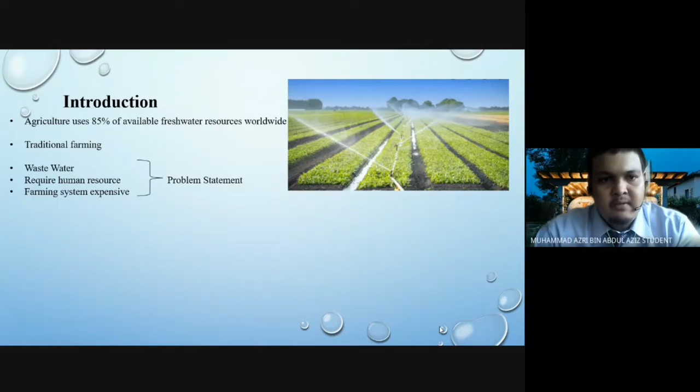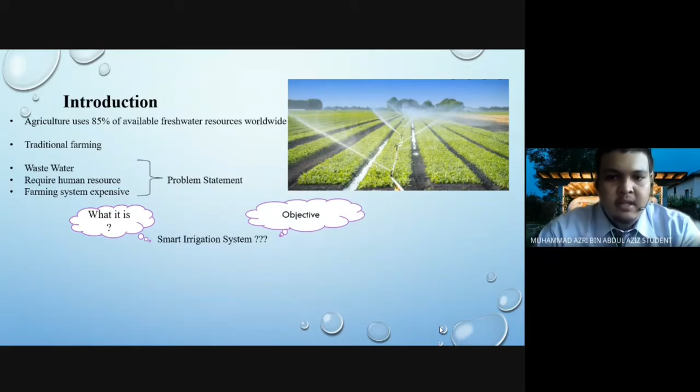So we are here to design a smart irrigation system. A smart irrigation system helps farmers control their crop condition automatically based on sensors. The objective is that the system should be sustainable and affordable, while maintaining the crop conveniently.

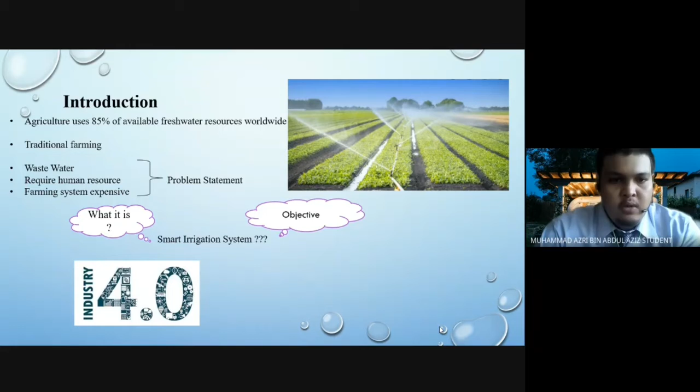We use Industrial Revolution 4.0, which is the Internet of Things, in order to support SDG goal number 12, which is responsible consumption and production. That's all from me. Thank you.

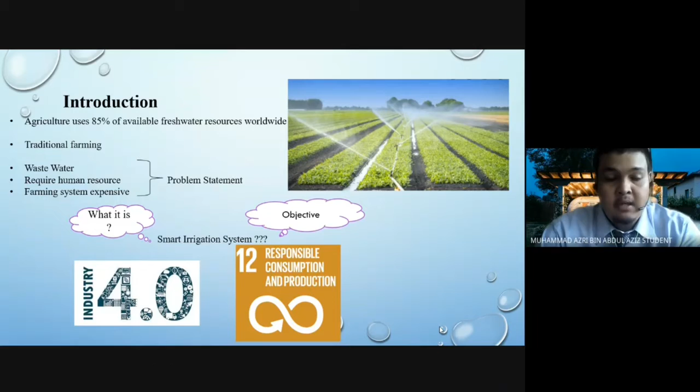This section focuses on outlining current available products of existing precision farming systems. This is to understand the key performance of the products toward obtaining customer requirements, and also to determine which among the three selected performs best in suiting customer requirements.

These are the three selected products. The first is Gardena Micro Drip Irrigation System, a timer-based irrigation system powered by battery to supply water to the plant. The second is a manual simple irrigation system, which is a simple manual watering system that requires electricity from the power grid. The third is TB-Hyve XR Smart Sprinkler Control, a Wi-Fi based sprinkler timer used to irrigate farms.

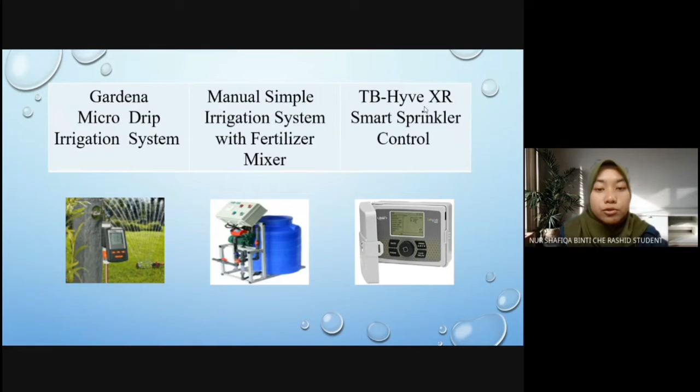Next is 2.2 Design of Market Survey. In this survey, it is targeted to obtain about 50 respondents through questionnaire. A questionnaire is a set of questions created to gather information.

In order to carry out the survey efficiently, especially through this pandemic situation, the questionnaire was generated through Google Form, which gives advantage in terms of reaching farmers, especially those staying in rural areas. This questionnaire consists of three separate sections: Section A, Section B, and Section C.

Next is 2.3 Survey Analysis. Section A is Demographic Profile, also known as personal information. It consists of gender, age, and scale of farms.

The next is Section B, which is General Overview. Here is the question we asked respondents to answer. In this section, it helps to understand what problems are related to the farms.

The last is Section C, Customer Requirement. This section is about respondents' opinion on the solution provided through Likert scale type questions. This information corresponds to the customer requirement which will be implemented in a house of quality.

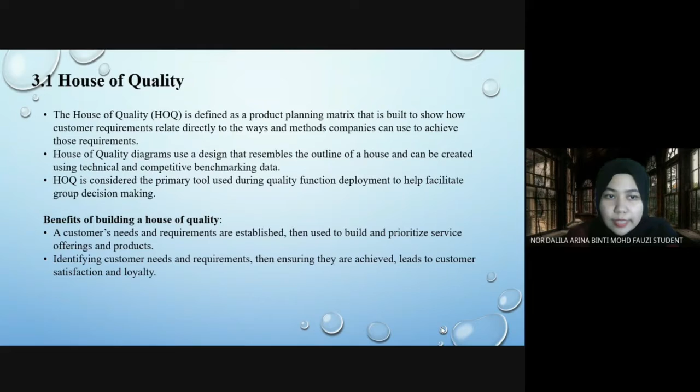Benefits we can get from house of quality: customer needs and requirements are established, then used to build and prioritize service offerings and products. Second, we can identify customer needs and requirements, then ensure they are achieved, leading to customer satisfaction and loyalty.

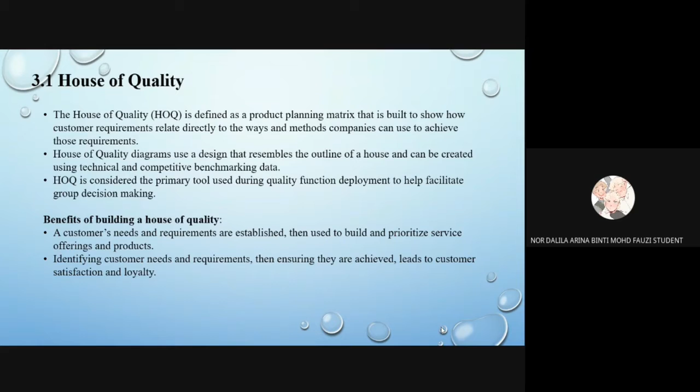First is reliable, easy to maintain, minimize water usage, save time, smart water control system, low electricity usage, affordable, environmental friendly, easy to use, and reduce manpower.

Then we look at engineering characteristics. We conclude that from our design, it consists of cost, material rigidity, volume of tanks, weight, durability, time taken to install, electricity, and expected lifetime.

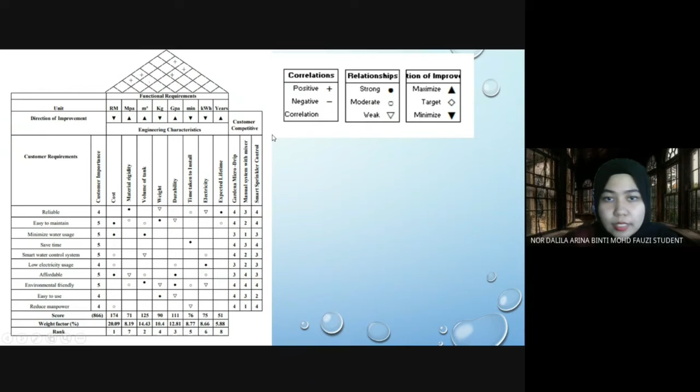Next, we see customer competitive, which is Gardena micro drip, manual system with mixer, and smart sprinkler control. From this rating, we can see that Gardena micro drip has the highest rating.

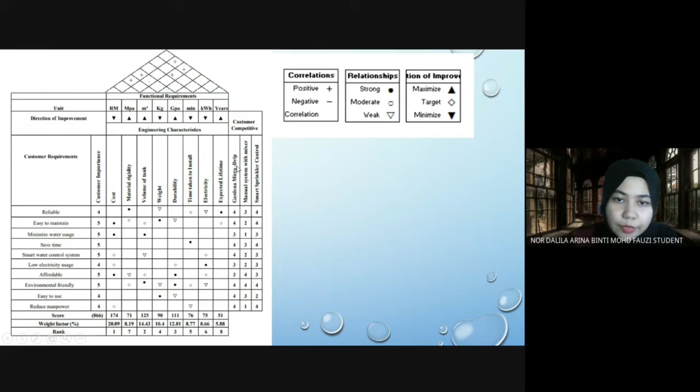Next, we move to product design specification. What is product design specification, or PDS? Product design specification is a listing of the critical parameters, specification, and requirements for the product you are designing. It is a statement of what the product should be and should do. PDS is created during the problem definition activity very early in the design process.

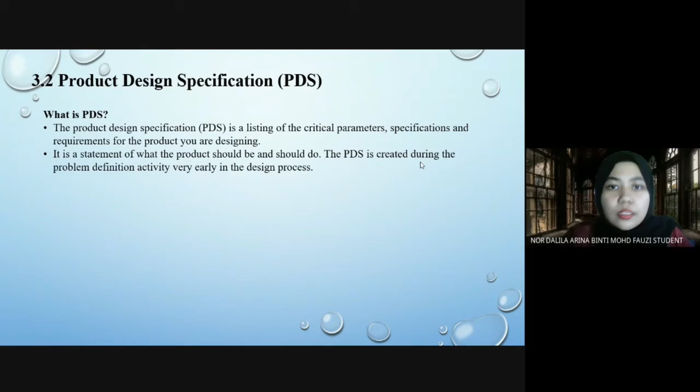Why is product design specification important? PDS is important because they can provide clear instruction on project intent, performance, and constructions. So these are the product design specifications of our project, which is smart irrigation system.

First, we have product identification. As we can see, it is an affordable precision farming system, away from electrical grid and power system. Smart watering system that avoids plants from drying out. Next, market identification: it consists of small agricultural and small holdings, and farmers have limited space for farming.

The third is special feature: Arduino microcontroller in our project. The Arduino microcontroller is used to operate the solar power pumping system. Then, we also use a moisture sensor. The moisture sensor is to detect moisture in the soil.

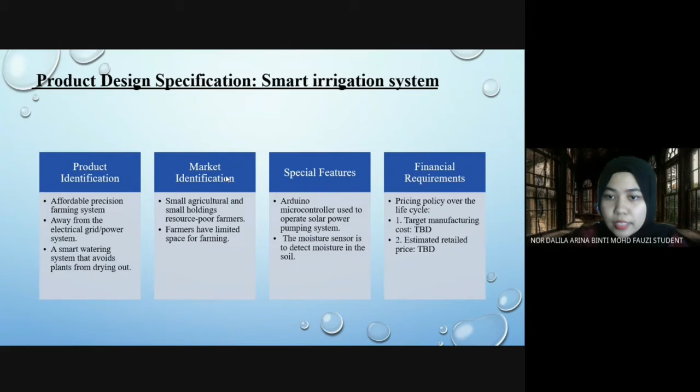Fourth is financial requirements. Pricing policy over the life cycle: the target manufacturing cost is later to be discussed, and also estimate retail price is also to be discussed. Then we have key performance target. We can collect and distribute available sources such as water source and utilize resources in a smart way. We can water the crops in both wet and dry season.

After that, we have life cycle targets. It is useful for 5 years of life and beyond. It also has maintenance schedules. Next, we have service environment. It provides long-term warranty and low maintenance costs for the product. Renewable power is also available every day, and even on cloudy days we produce some power.

Then we have key project deadlines. It takes 6 months to finalize a design. Our target is for the dry season and rural area. Next, we have social, political, and legal requirements. We will follow the safety and environmental regulations. All the safety precautions will be followed in the installation process to avoid any injuries.

Then we have physical description. We have solar panel dimensions consisting of 1 meter long and 1 meter wide. Then we have the Arduino system and pumping system. For manufacturing specification, all framing and components will be installed and manufactured by the user. That's all from me. Thank you.

I am Kho Ying Ying. I will continue with Chapter 4, Concept Generation. In the generation phase, we use several methods to analyze concept. First, functional decomposition: physical decomposition of the smart irrigation system. We divided it into three main subsystems, which are mechanical subsystem, control subsystem, and power supply subsystem.

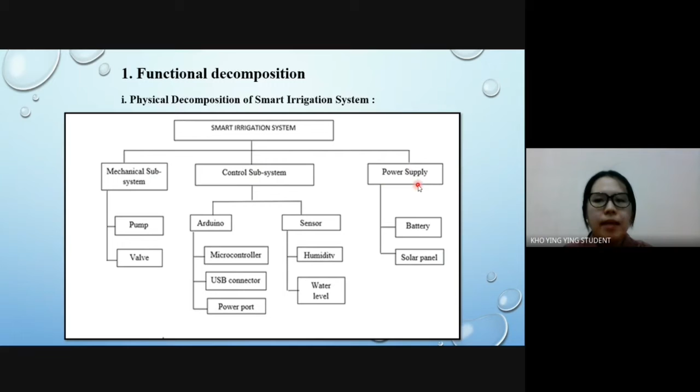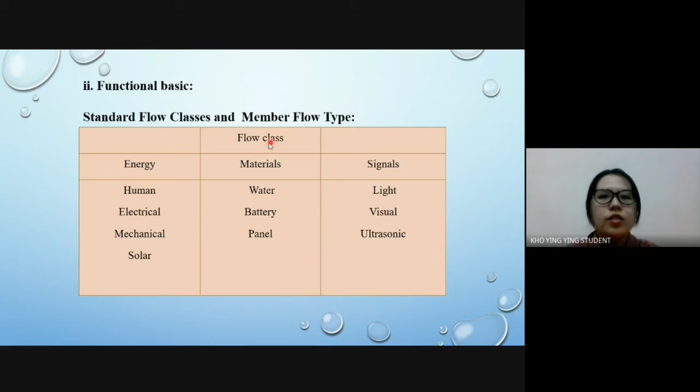Functional basic, standard flow classes and member flow type. The table shows the flow classes of energy, materials, and signal transmission. Systematic design: for the function structure, energy will flow in the system. This energy is solar energy, mechanical energy, and human energy. When energy flows, water will go through all systems and go to the plant.

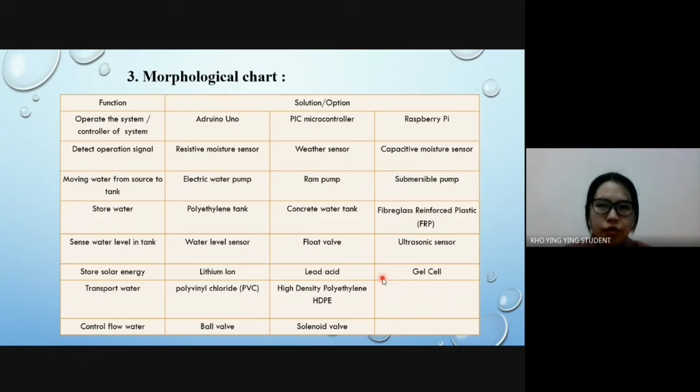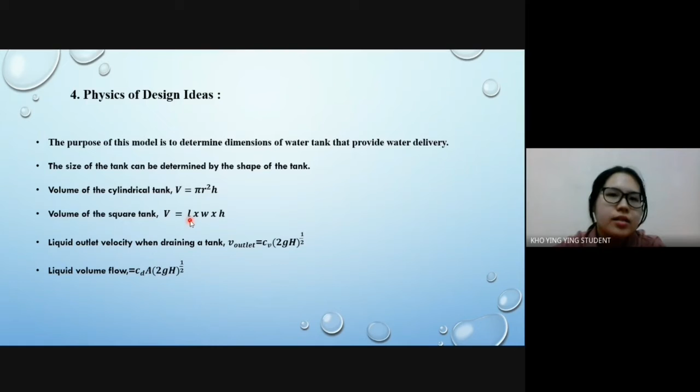Morphological chart. Our functions are listed on the left side, while our different solutions and options are listed on the right side. Thus, this chart uses a matrix of functions as a mechanism that we use. Physics of design ideas: we use these four equations, where R is radius of tank, H is height of tank, L is length of tank, and W is width of tank.

Concept design consists of three concepts. Concept 1 implements Arduino as the main controller of the system that controls sensor, valve, and pump. Water from water source to tank is done by an electrical pump that will turn on and off depending on the level of water in the tank. The water level in the tank is monitored by a water level sensor. A capacitive soil moisture sensor is installed in the soil of the crops to detect the water requirements of crops.

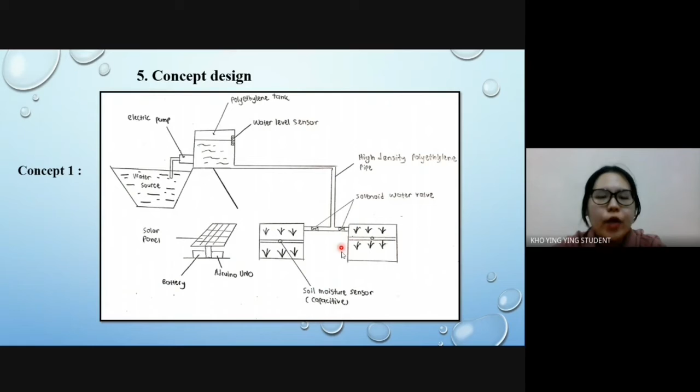Design 2 was implemented with a PIC controller. The ram pump transports water from the water source to the storage water tank through the pipe. The float valve water level sensor will detect the water level of the water tank. The moisture of the soil is measured by a resistive moisture sensor. A solenoid valve is used for watering the crops when soil moisture is low.

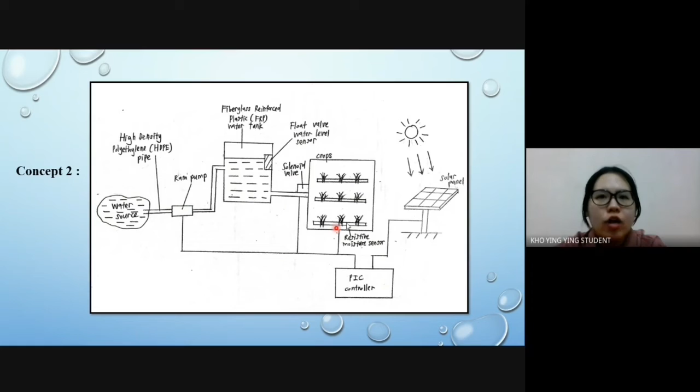Concept 3 uses Raspberry Pi as the main controller. Water from water source to tank is done by an electrical pump. The level of water in the tank is monitored by a float valve.

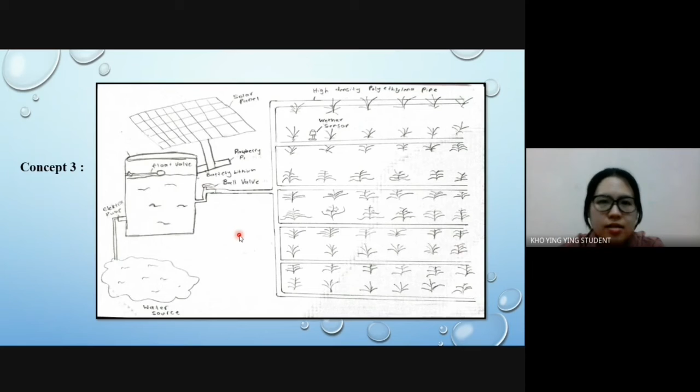Weather sensor is being used to detect weather and temperature at the soil of the crops to detect water requirements of crops. These three concepts will be generated based on methodological charts and the best concept will be chosen for our project. Last but not least, design parameter and constraint.

In a project report, we need to identify which parameters need to be considered and additional parameters that need to be added to the list. Design constraints help to narrow down the choices when creating a project, such as economical constraint, environment constraint, and sustainable constraint.

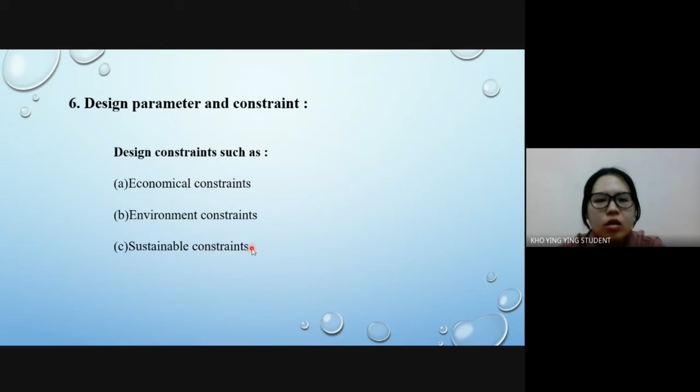First we start with Pugh chart. Pugh chart is a useful method that can identify the most promising design concept among the alternatives generated. In table 5.1, we choose the Gardena Micro Drip Irrigation System as the datum for the Pugh chart. For each criteria in the table we put plus, minus, or same for the three concepts. After filling all the criteria, we calculate how many times plus and minus occur for each concept, and we obtain that concept 1 has the highest total weighted score, which is 2, concept 2 obtains 1, and concept 3 obtains negative 1. So concept 1 gets total weighted score of 2.

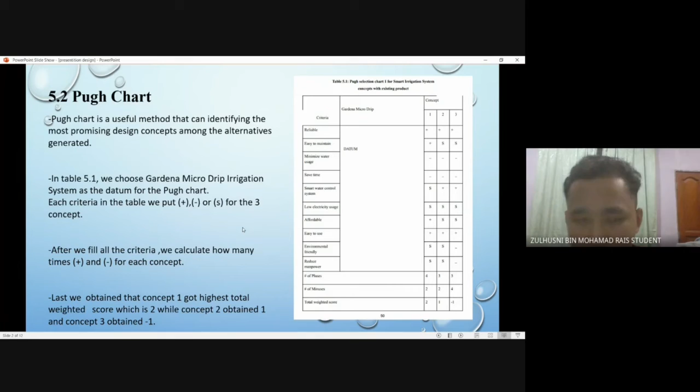Next, in table 5.2, concept 1 is set as the datum since it has the highest number of plus and the highest total weight score compared to other concepts. The total weight score of concept 2 and concept 3 obtain negative value. So we conclude, based on this table, we take concept 1 as the best among the other concepts generated.

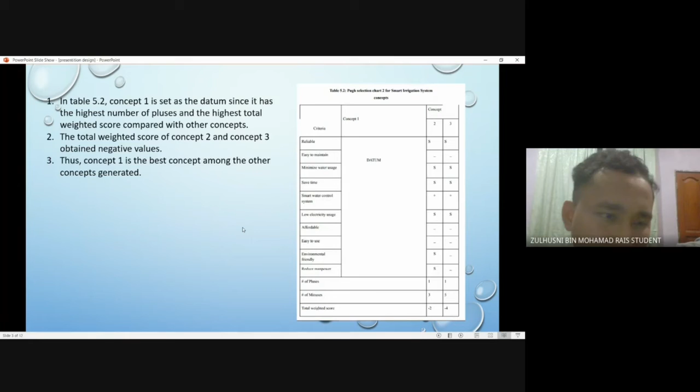Next, the weighted decision matrix. A weighted decision matrix is used to compare alternatives with respect to multiple criteria of different levels of importance. There are lists of values in rows and columns, allowing systematic analysis and rating of the performance and relationship between sets of values. These two tables are related to each other. Smart irrigation is value 1.0, cost 0.3, and maintenance cost, for example, the value is 0.3.

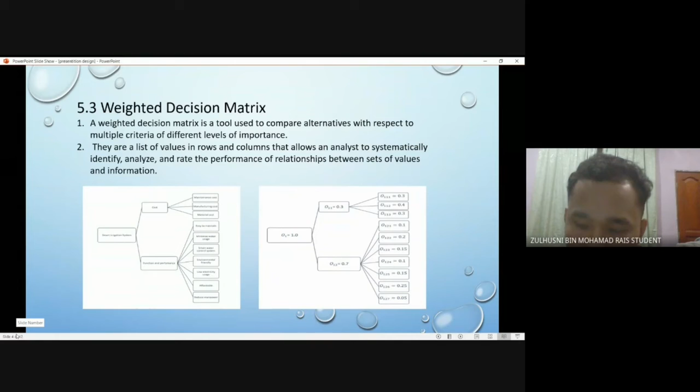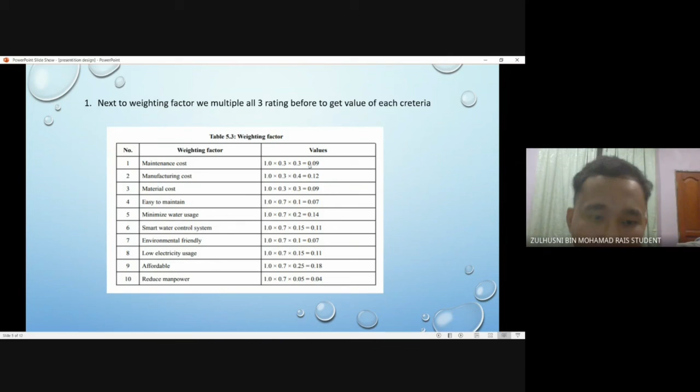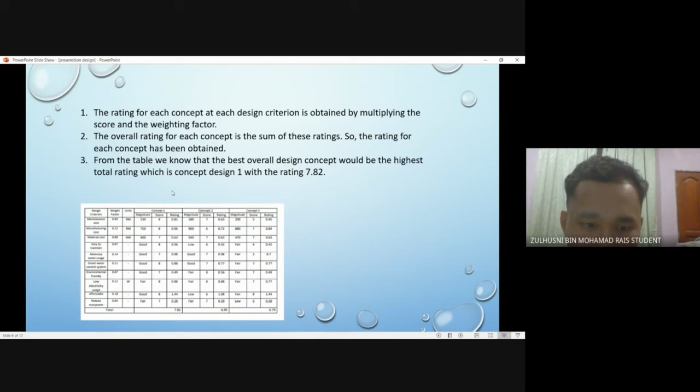Next is the weighting factor. We multiply the 3 ratings to get the value of each criteria. For example, maintenance cost, we get 1.0 multiply 0.3 multiply 0.3, so we get 0.09, and do the same for other criteria. Then the rating for each concept of each design criteria is obtained by multiplying score and weight factor. So when we get the weight factor, for example maintenance cost 0.09, the score we put is 9, so we multiply and get 0.81. The overall rating for each concept is the sum of these ratings. If we see the table, concept 1 obtained 7.82, concept 2 obtained 6.95, and concept 3 obtained 6.79. So we take concept 1 as our design using this method.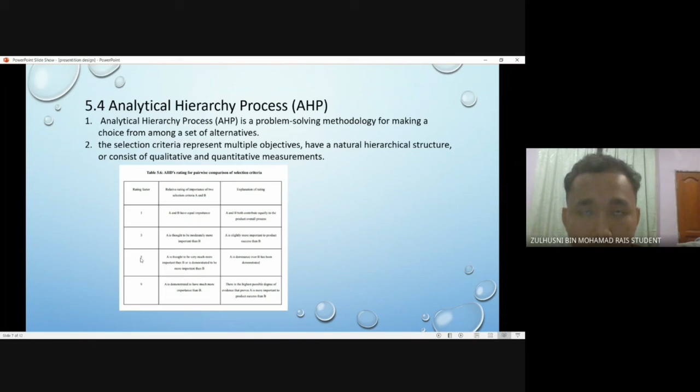Then, analytical hierarchy process, AHP. AHP is a problem solving methodology for making choices among a set of alternatives. The selection criteria represent multiple objectives, have a natural hierarchy structure, and consist of qualitative and quantitative measurements. If we think they are equal, we put rating factor 1. If more important, we put 3. And if much more important, we put 9 as the rating factor between the criteria. The function of the AHP rating is to create the initial comparison matrix as shown in table 5.7.

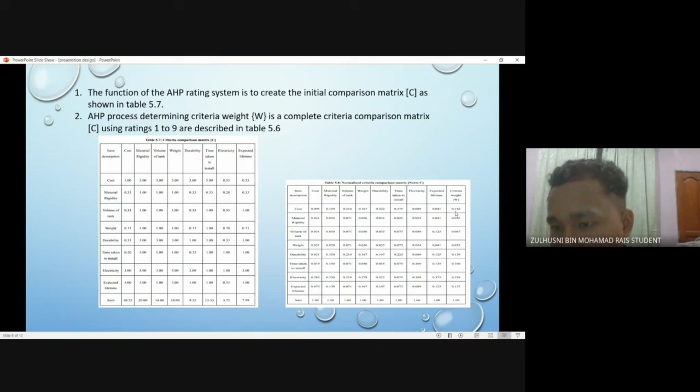In table 5.7, cost is compared with material rigidity, and cost is more important, so we put 3. Then in table 5.8, we calculate the criteria weight and get 0.182.

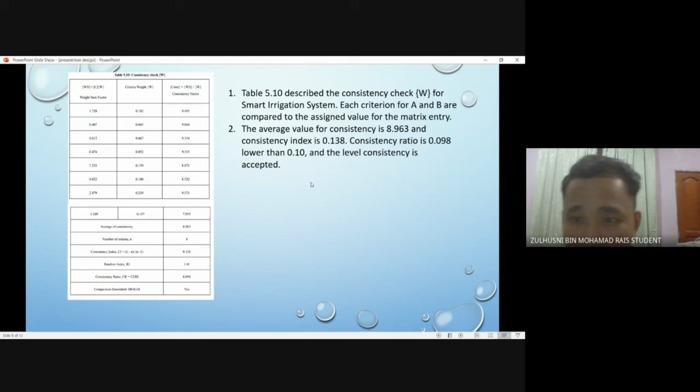Then we used this to compare design alternatives, comparing the three concepts for cost. Concept one is the most suitable because when concept one is compared to concept two, concept one is three times more important, while concept one compared to concept three is 5 times more important. So we get the design alternative P of 0.634 for cost.

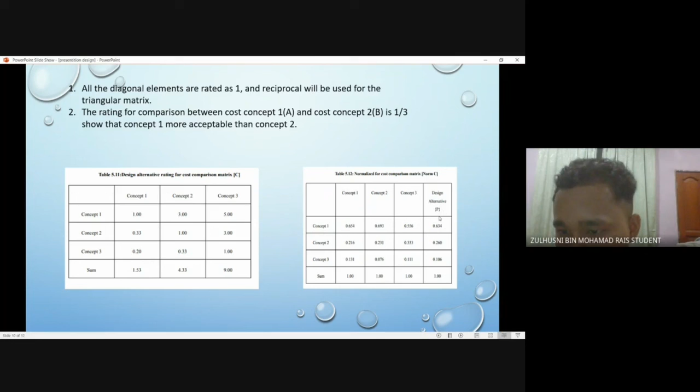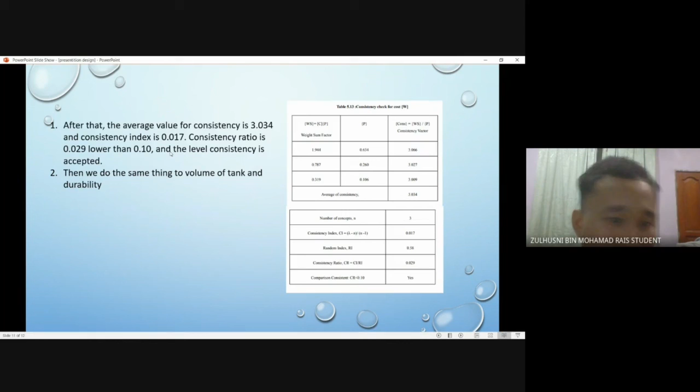After that, we get the average value for consistency as 3.034, and consistency index of 0.017. The consistency ratio is 0.029, lower than 0.10, so the level of consistency is accepted. Then we repeat the same process for volume of tank and durability.

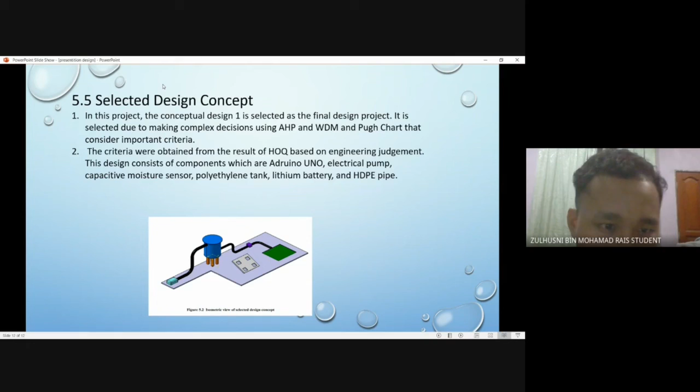Lastly, the selected design. In this project, concept one is selected as the final design project. It is selected due to making complex decisions using AHP, WDM, and Pugh chart that consider important criteria. These criteria were obtained from the result of HOQ based on engineering judgment. The design consists of components which are an electrical pump, capacitive moisture sensor, polyethylene tank, lithium battery, and HDPE pipe. That's all for me, thank you.